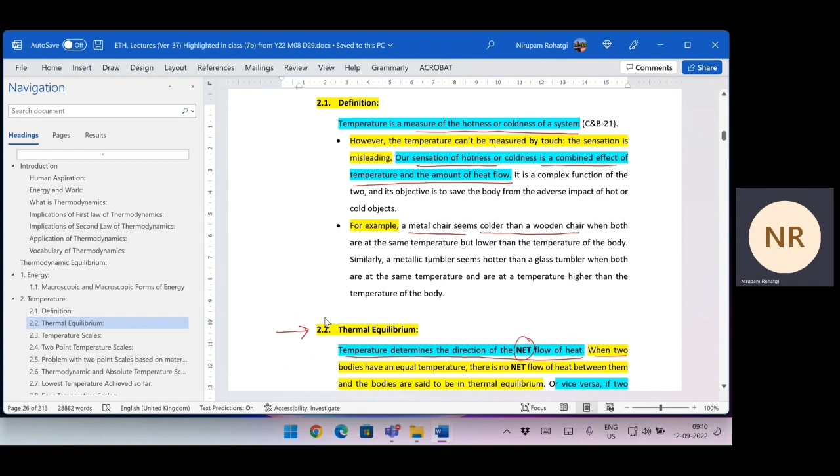Okay. Then we talked about thermal equilibrium, and I said one thing, that heat flows in both directions, from hot body to cold body and cold body to hot body. If somebody tells you that heat doesn't flow from low temperature to high temperature, then it is wrong. It flows either way. The only thing is the net heat flows from high temperature to low temperature. And there are certain cases in which net heat also flows from low temperature to high temperature.

But that occurs in gas dynamics, right? And some part of that is in air conditioning. Okay. But in gas dynamics, it's a mix of the kinetic energy as well as heat. So it turns out that heat is flowing from low temperature to high temperature. But leave that aside, you will discuss that in Rayleigh flow, I think. You will be reading it next year in gas dynamics. Okay. So what we say is that heat flows from high temperature to low temperature. Okay, that is the net heat flow.

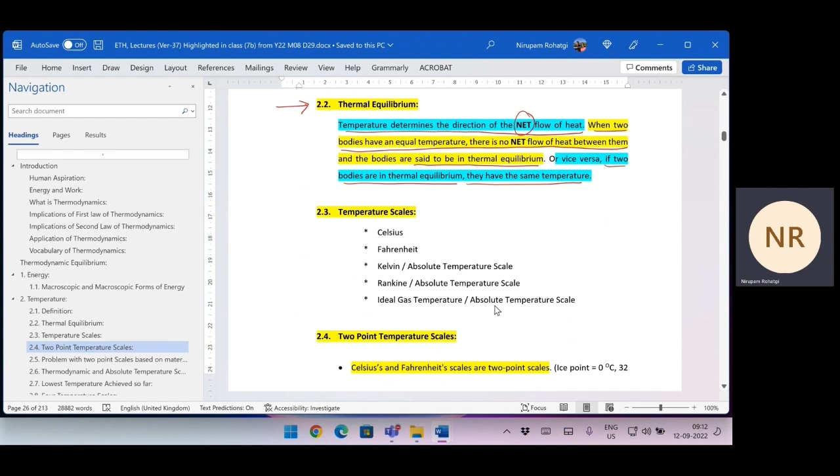Now what are the temperature scales we have? There are 5 of them. One is the Celsius scale. The second is Fahrenheit. You have the Kelvin scale, which is also called an absolute temperature scale. Then the Rankine scale, also called an absolute temperature scale. And ideal gas temperature, also called an absolute temperature scale. So these three are absolute temperature scales, and these two are relative scales. Okay, so let us see what happens.

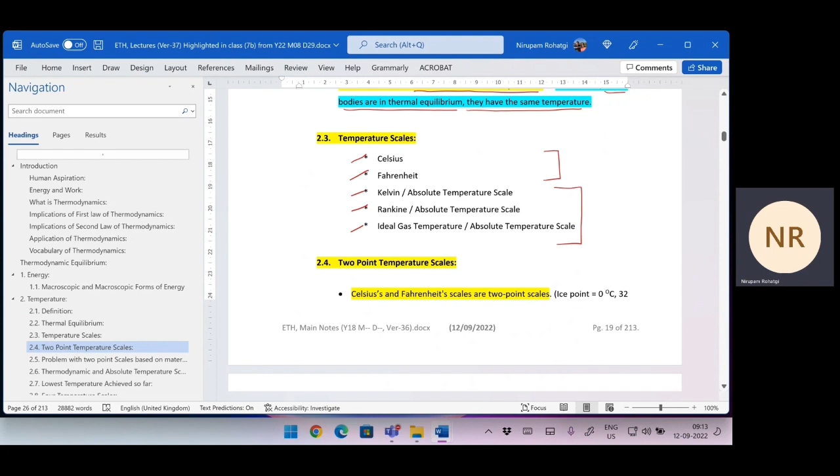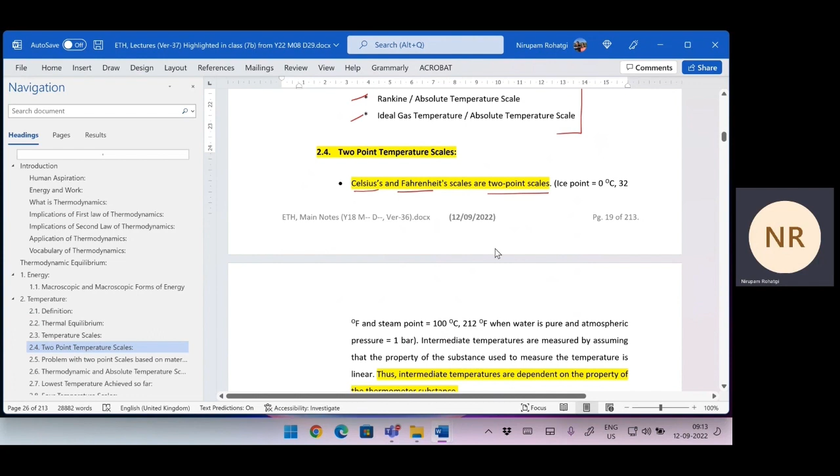So when you talk about Celsius or Fahrenheit, how does this scale work? It is called a 2-point scale. And you know the first point is the ice point and the second is the steam point. So what the scientists have done is they have said that the ice point, when the ice starts melting, let us call it 0. So they have themselves given it a value 0. Then take the steam point, when the water starts boiling, and call it 100 degrees.

Why do they do it? Because these temperatures remain constant for a long time. It is easy to produce 0 degree C and 100 degree C. But if you want to produce 50 degree C, you cannot. Okay. If you keep water in a flask and make it 50 degree C, we will call it 50 degree C. But you will not be able to maintain that temperature, because the moment you put water in the flask, it will start cooling down.

Right? It is only when it comes to the atmospheric temperature that it will attain a stable temperature which you can measure. But atmospheric temperature changes day by day, time by time. So you don't know what the temperature is.

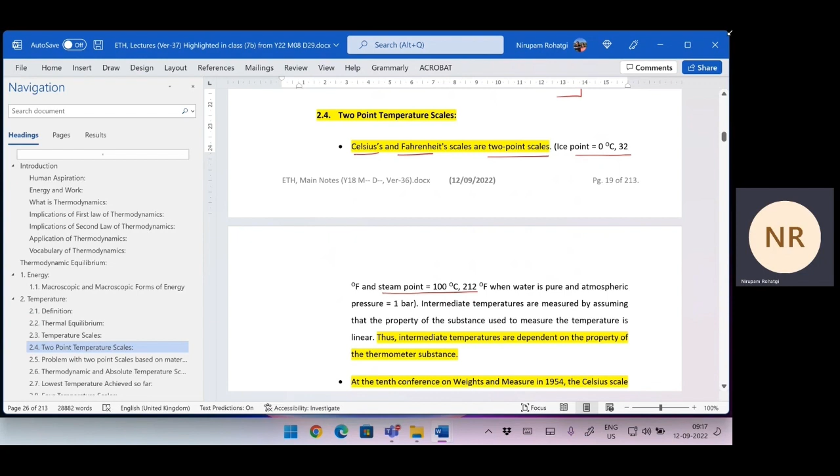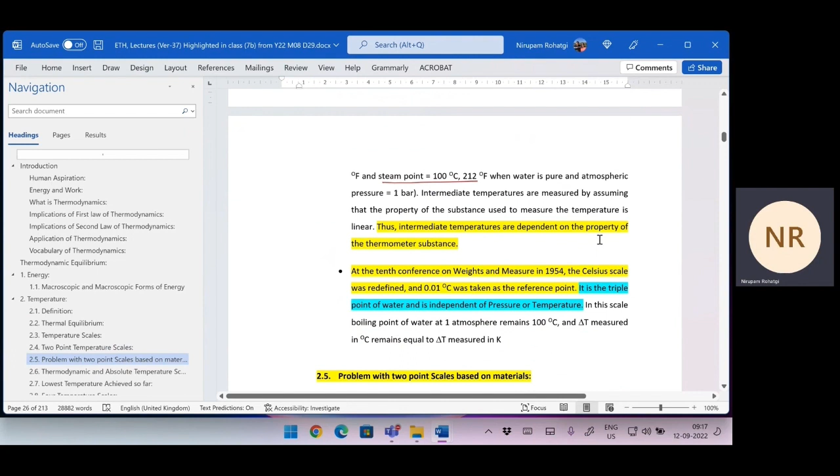That is why we use these temperatures as, you can say, governing points. They are the fixed points. Okay, so that is why these scales are called 2-point scales. Now, the problem is, okay, before that, there is some change which we did. This was the initial thing.

So people realized that there is something called the triple point. It's called the triple point of water. Now the beauty of the triple point of water is that if the water is pure, it is independent of the pressure. What is a triple point? When all three phases of water are present together, right? So water is present, ice is present, steam is present. If you can produce that, and people can produce that, then the temperature will be 0.01 degrees C.

So earlier they defined 0 degrees C as the ice point. Using the same scale, they found that the triple point is 0.01 degrees C. They didn't want to change their original scale and make the triple point 0 degrees C. They said let the whole thing remain the same, the ice point will stay 0 degrees C. But they started using 0.01 degrees C, the triple point, as the reference point.

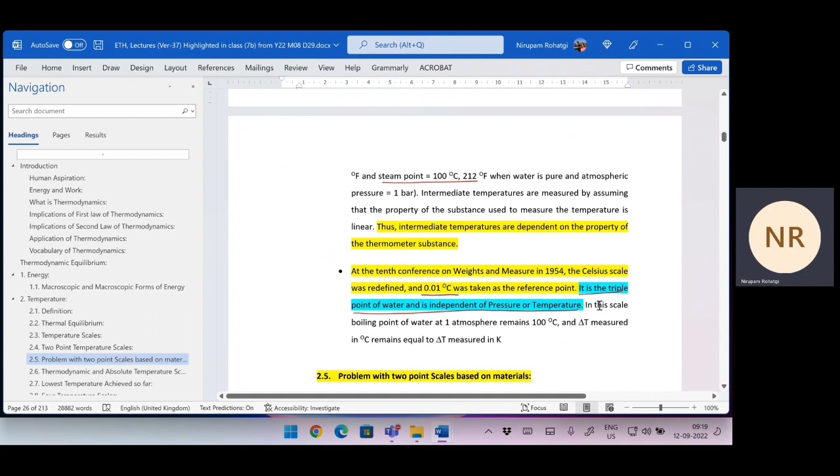So suppose they want to check whether their temperature scale or thermometer is accurate or not. Instead of checking it from 0 degrees C, they will check it from 0.01 degrees C, the triple point. Okay, so now we have the triple point instead of the ice point, and again the steam point. And why did they adopt the triple point? Because it's more accurate and independent of atmospheric pressure.

Now how do we measure the temperature in between? If I want to measure 50 degrees C, how do we measure it? 70 degrees C, how do I measure? Your temperature cannot be measured directly. This is the problem. By touching you cannot tell. How do you tell it? There must be some observable property connected to temperature.

And what is that? You have some property, like in a thermometer you have a thread of mercury, and the elongation of the mercury tells you what the temperature is. Okay. So they have to look for a substance, and a property of that substance that varies, let us take the volume of the gas.

They are called gas thermometers, based on gas, ideal gas, or thermometers with mercury or some alcohol. Okay, so you have to have some material whose expansion is measured, and that expansion is translated into temperature. This is what is happening.

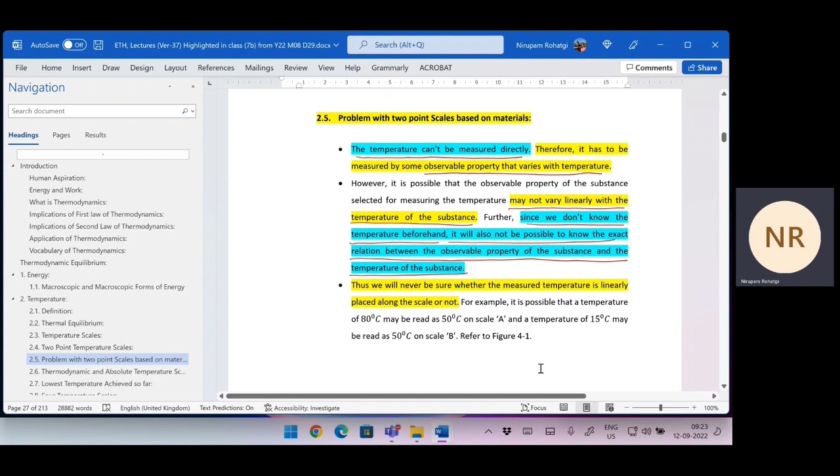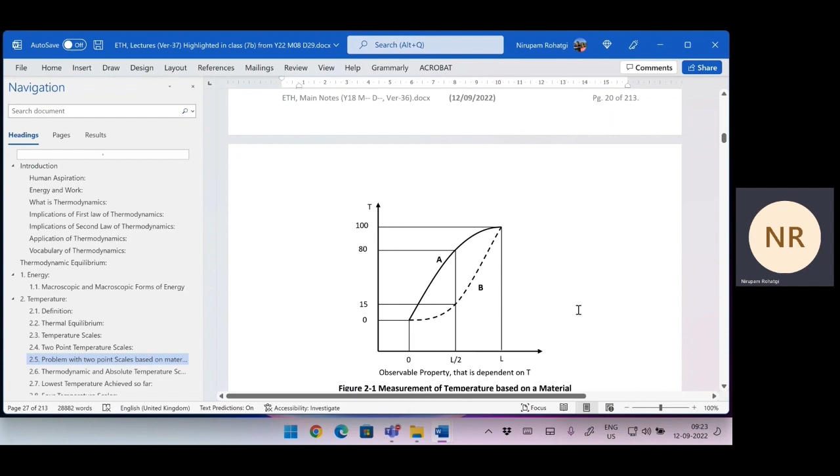Okay. Now let us take an example. There are two different types of scales. Now this is your observable property on the x-axis. There is a property which you are measuring, let us say it's the length or volume. Now on the other hand, there is a substance A which is changing like this with temperature, and a substance B which is changing following this curve with temperature. Now what will happen when you are at L/2? You say this is 0 degrees C, this is 100 degrees C; we can reproduce these from the ice point and steam point, no problem.

But when we are at L/2, we call it 50 degrees C. But when we take A, it's actually 80 degrees C. And for B, it is actually 15 degrees C. Only when it is linear is it 50 degrees C. But how do you know it is linear? Because you don't know the temperature. How will you draw the relation?

So the problem is, in measuring the temperature, you are assuming that the substance on the basis of which you are measuring the temperature is changing linearly with temperature. So this problem will always remain there with the thermometer, whether it is a mercury thermometer, a gas thermometer, or an alcohol thermometer. It will always remain like that. Okay.

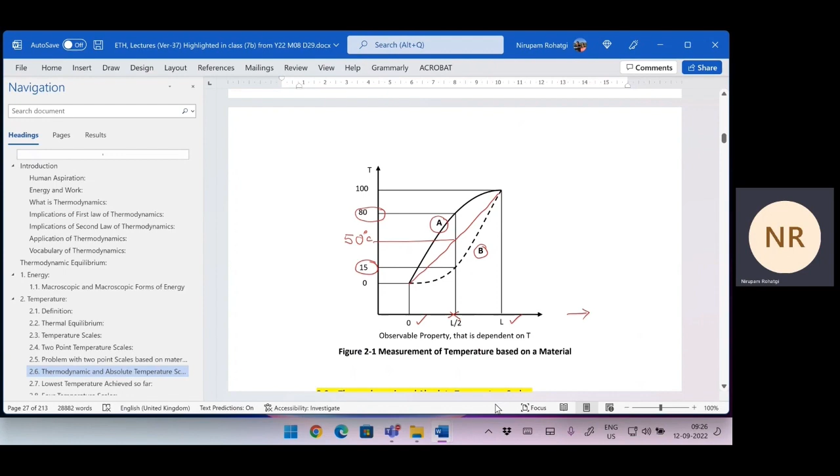But we have a way out. There is a way out, and we will talk about that. Then we talk about the thermodynamic and absolute temperature scales. So what is the thermodynamic temperature scale? The thermodynamic temperature scale is one which is independent of the substance of the thermometer. So we can develop a scale which is independent of the substance of the thermometer, and that is called the thermodynamic scale. How do we do it? That we will see later on.

But there exists one scale. Okay, at least in principle it exists, and it is by virtue of the second law. When we study the second law, one of its corollaries proves that there exists a thermodynamic temperature scale which is independent of the substance. That can be proved from the second law of thermodynamics. Okay, but we will keep it to that point. But there is a scale.

Then there is also a scale which is called the absolute gas temperature scale, and that depends upon ideal gas. So if you have ideal gas, the scale you get is called the absolute gas temperature scale. It is also called, in short form, the absolute temperature scale. Okay. Now this scale is also independent of the material, but you are using gas to find that temperature. There is no escape from this. You have to use some material. So you use ideal gas, and ideal gas is not available. There is no gas that is an ideal gas.

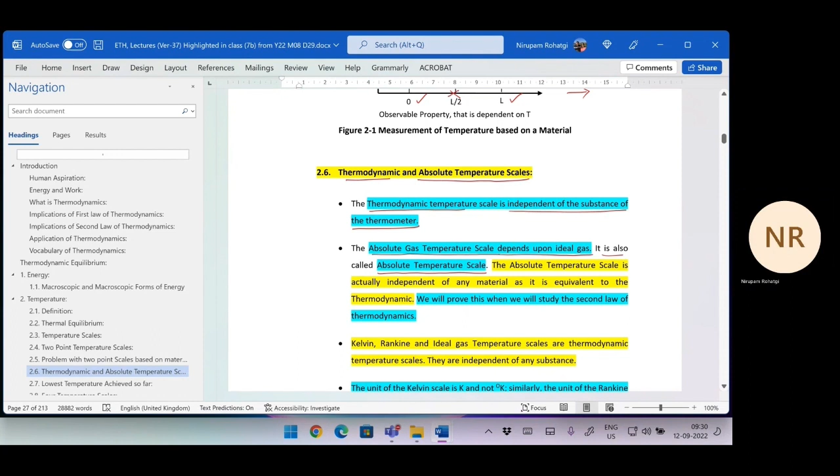Okay, so this is called the absolute temperature scale, and this is equivalent to the thermodynamic temperature scale, and we will talk about it later on. Now, Kelvin scale, Rankine scale, and ideal gas temperature scale are all thermodynamic temperature scales. They are all independent of any substance. Okay.

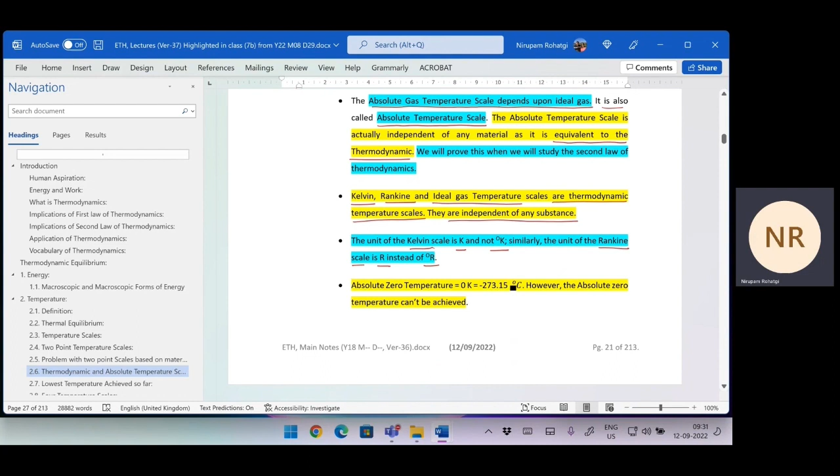Then one thing you remember, that for the Kelvin scale you will always use the letter K and not degree K. That is a standard notation, and we do not use degree K, we use K. Similarly, for the Rankine scale, R is used instead of degree R, because both these scales are absolute temperature scales or thermodynamic temperature scales. So we are not using degree here. Remember, and with Celsius and Fahrenheit, you will put degree. Okay.

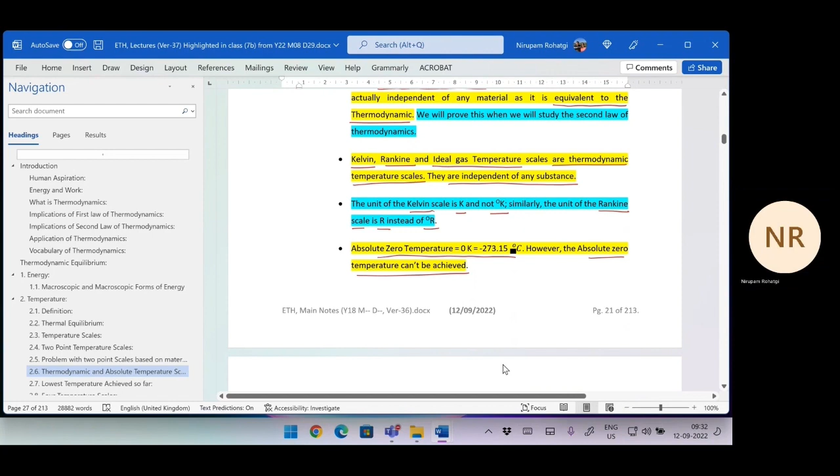Now, what is your absolute zero? Absolute zero is minus 273.15 degrees Celsius. This is absolute zero, and the theory says that absolute zero cannot be achieved. Okay. Now we talk about what is the lowest temperature which has been achieved so far. So can anybody guess? I remove this from here. What is the lowest temperature the scientists would have achieved?

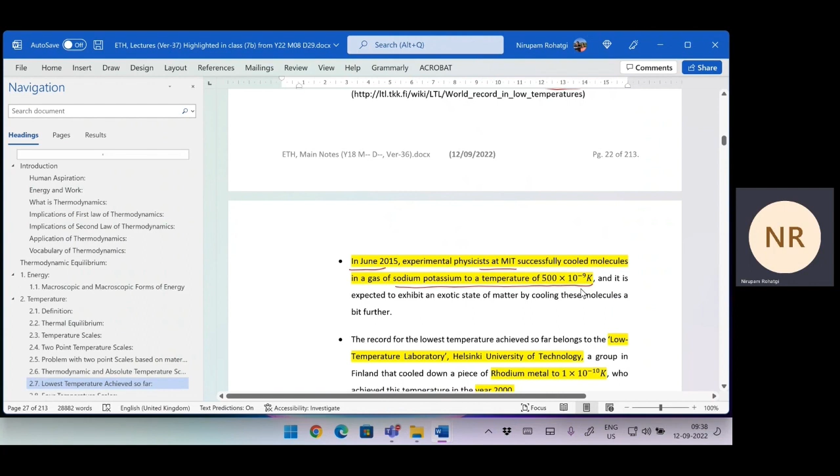The record lowest temperature: again at Helsinki University of Technology, rhodium metal was cooled to 1 into 10 raised to minus 10 Kelvin, and this was in the year 2000. Whether they could go still lower, we don't know, but it is the closest to 0 Kelvin they have got. So you can see that there are labs working only on low temperatures. There are Nobel Prizes only for achieving low temperature. So it has been such an important topic in thermodynamics.

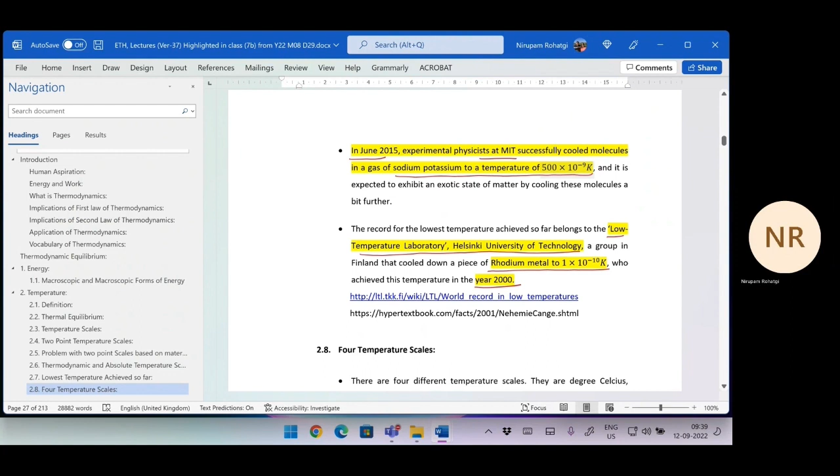Now let us talk about the 4 temperature scales. How do they look? These are the 4 temperature scales, and I have put all of them together. For the boiling point of water, you have the degree Celsius scale here, Kelvin here, Fahrenheit here, and Rankine scale here. The values are given. You can note them from the book also. Then the triple point, then the ice point, and absolute zero. Absolute zero is 0 only in the Kelvin and Rankine scales. For Fahrenheit and degree C, you have to convert it. So this is how they are related.

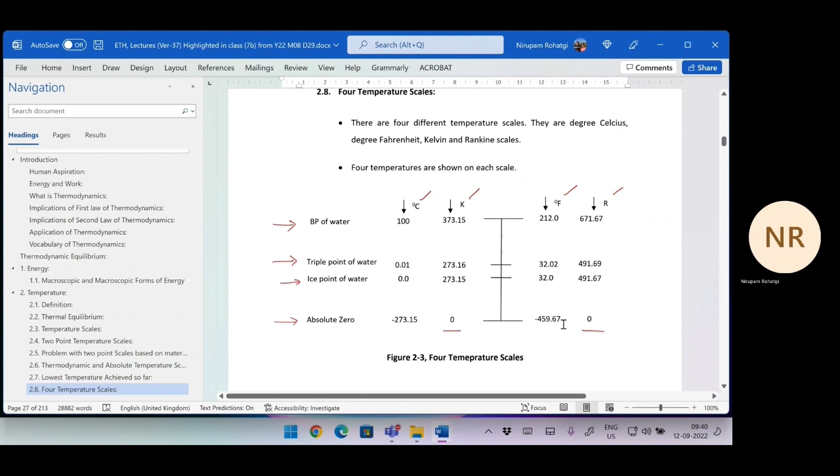Now, how do we convert one temperature scale to another? You have been converting degree Celsius to Fahrenheit, Fahrenheit to degree Celsius, and maybe to Kelvin also. So I will tell you some important points. First, they are all related by an equation y = mx + c. They are all linear scales. On the x-axis you can draw one scale, on the y-axis another, take 2 points, and find m and c yourself. And I have done it here.

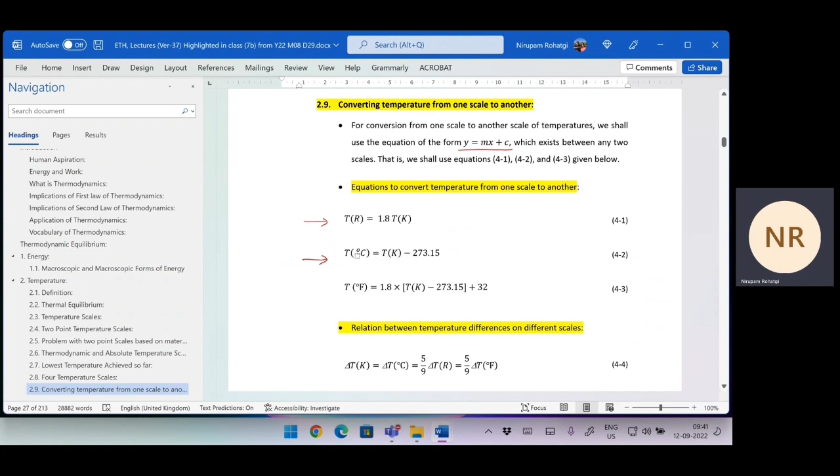To convert Kelvin into Rankine, you multiply the Kelvin value by 1.8 and you get the value in Rankine. If you want degree C, take the value in Kelvin and subtract 273.15. And if you want Fahrenheit from Kelvin, convert Kelvin to Celsius and put it here. If you have a direct Celsius value, 1.8 into temperature in Celsius plus 32 will give you Fahrenheit.

Another important thing to note is that temperature difference in Kelvin and Celsius is the same. So 1 Kelvin difference equals 1 degree C. Similarly, Rankine and Fahrenheit have the same gradation. Only Rankine starts from 0 and Fahrenheit from about minus 459. Similarly, Kelvin starts from 0 and Celsius from minus 273.15. But all along the difference remains the same. So delta Kelvin equals delta degree C, delta Rankine equals delta degree F, and the relation between them is 1.8.

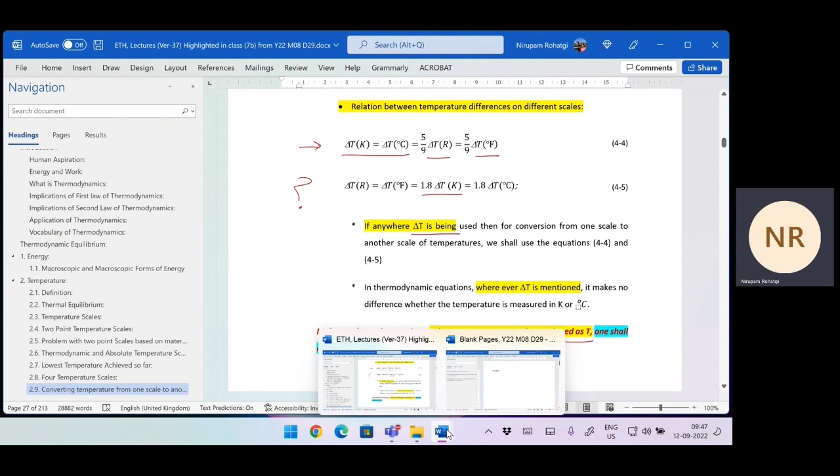So remember, if you are converting Kelvin into degree C, if the formula depends upon the difference between the temperatures, then you can do it. But if it is not depending upon the difference in temperature, but the value of the temperature, then you cannot do it. For example, I give you two equations.

Suppose I write this equation, Q is equal to minus kA delta T by delta X. You know this. In this equation, this can be Kelvin or degree C. Your answer will be the same, because it is delta T. But take this equation, Q is equal to sigma A T to the 4. This is radiation. Here T in Kelvin cannot be equal to degree C. You cannot replace Kelvin by degree C.

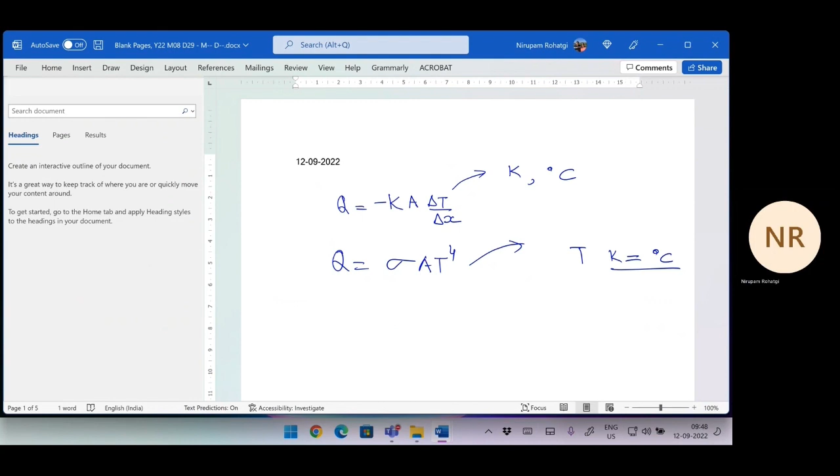Okay. So this you have to take into account. Otherwise, you will fall into mistakes. Okay. So, any questions?

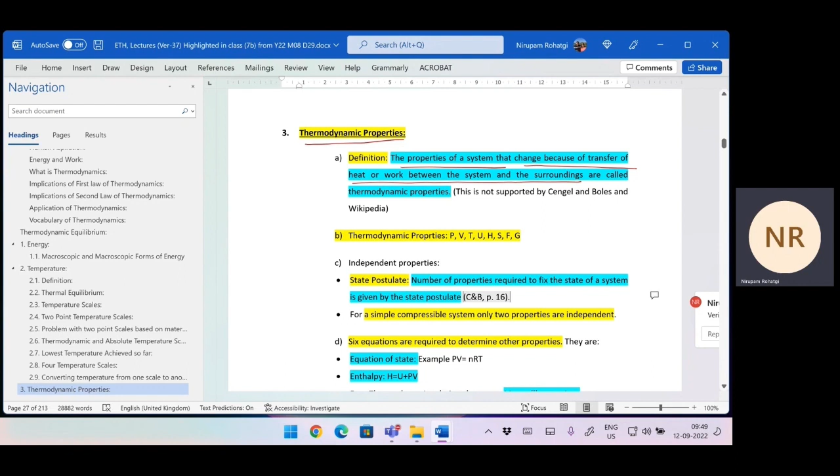Okay, we take one small article here also. Then what are thermodynamic properties? We have talked about it, but some more addition to it. Thermodynamic properties are the properties of a system that change because of the transfer of heat or work between the system and the surrounding. And these are our thermodynamic properties. Out of these, three are principal thermodynamic properties. We have already discussed it.

Then there is something called the state postulate. It's a postulate, so there is no proof for it. The number of properties required to fix the state of the system is given by the state postulate. So if you find that a system is completely defined by two properties, then its state is two-dimensional. There are two independent properties. The remaining all are dependent on them. So it can be different for different systems.

But they say that for a simple compressible system, only two properties are independent. So if you have gases, a simple compressible system, only two properties are independent. Which means if you know two properties of a gas out of these 8, then the gas state is fixed. You cannot change the state of the gas without changing those two properties. Then how do you find the remaining 6? They are related to the two independent properties. So this is a 2-degree system.